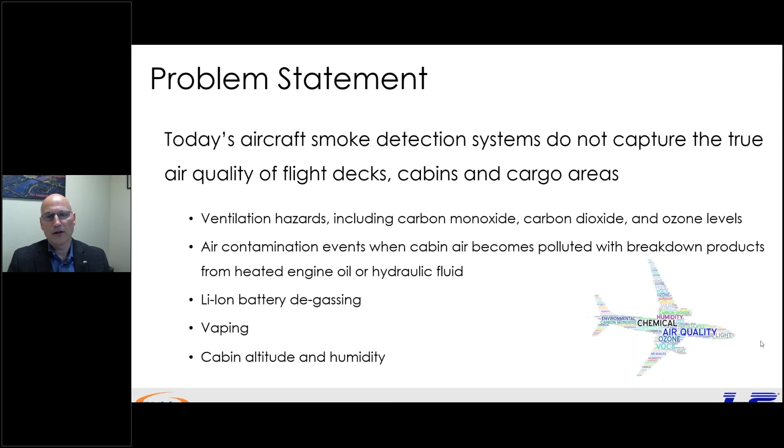And its unique ability to do the detection of vaping, to include THC for those so inclined. Frank and David will explain a little bit more later about the capabilities of the specific system itself.

Next slide please. So here's some quotes, and these were captured directly from a Flight Attendants Union website. A lot of information here, but what you can see is that they really take cabin air seriously, and they work directly with Washington D.C. to solve problems they can't really solve at the carrier level, at least they don't believe they could solve at the carrier level.

And the aircraft manufacturers either don't like or apparently don't agree with a lot of the cabin crew concerns or claims, based on some problem with the bleed air or air cycle design or system. However, it appears it is a real problem. There's a lot of examples when you just Google it on the web.

And there's the health data to back up the flight attendants' claims. Their data seems to be true. We don't have enough information to prove it, but there's enough of it that it makes us think that there is an issue, hence the problem statement.

And we notice their language at the bottom speaks about a lack of training on fume events. They really further the need for some device, an automated system of some sort, of measuring cabin air quality and then alerting the onboard crew appropriately so they can take action as applicable, either in flight or hopefully more proactively on the ground before the issue gets worse.

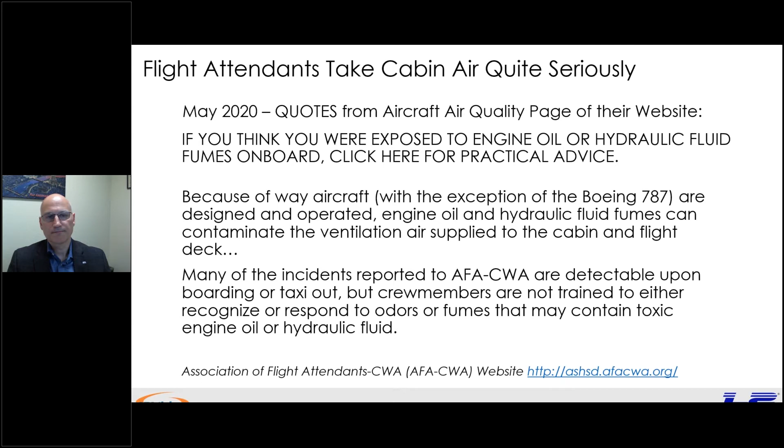Smells in the cabin. Well, we found out these meetings actually do occur, and we learned this when we were originally doing research about options for cabin air. And the original industry conversations meant that they had an issue, and they talk about it a lot. Now, while not naming the carrier, it was quite interesting.

There is enough concern about odor events, so much that the unions have asked for a forum with the airline's environmental systems engineers, and they're using that to investigate the odor, the occurrences, where do they come from, why, what can they do. And just want to add before we move on, I don't think they really call it the smelly committee. It's just something that we just thought it fits. So we have named it the smelly committee internally.

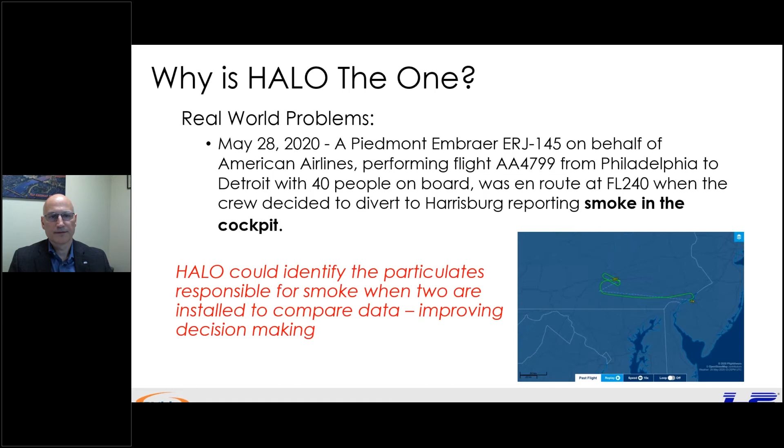We don't know the exact history behind that because it wasn't given to us, but it appears the same issue repeated. Halo is one of those systems that would be able to determine and watch the trends on the aircraft, and again we'll get into that a little bit later.

In this case, the maintenance group did ultimately find oil was getting into the engine, and therefore fumes were able to get into the bleed air system and then the air cycle system, and that drives right into the cabin. Then you smell it, and if it's really nasty stuff, people get sick.

Halo, we believe, could have identified the problem earlier, and maybe that could have helped them find that there was an engine seal that was bad and starting to fail, that maybe you didn't quite smell yet since it wasn't too bad. But these sensors are so accurate, well beyond what a human would smell, that they pick it up. If they could have defined that earlier, they would have repaired it quicker, and then they may not have had the diversion. So all in all, the precise data from Halo of what is exactly in the air can point to a solution, or at a minimum, eliminate a possible problem.

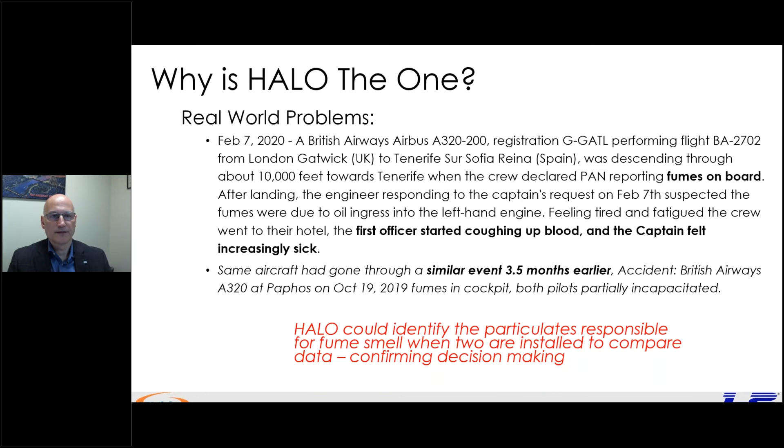So what's Halo? A classic product marketing and phase review process method, which I also love, defines what the product is and what the product is not. Today's Halo is sold in commercial buildings, schools, universities, just tons of places, and we want to move that now to the aircraft.

It can measure multiple chemicals, sounds, atmospheric items, as Dave will go into here in a little bit. The IP video team has a patent pending, and the current product in L2 is exclusively designing, ruggedizing, and integrating Halo for the rigors of aerospace use.

And then, of course, the next step is to get all the regulatory certifications worldwide. So the phase 1 version today is not a smoke detector replacement. We covered that before, but I want to make sure that's clear. We are investigating how to incorporate all of the Halo sensor suites and capabilities with the certified smoke detector at some point, and eventually, because of all the stuff we're reading about now with COVID and so forth, adding a pathogen and contagion detection device.

So we also have a vision for using Halo units and their wireless capabilities to transmit other data streams, more than just air cabin quality. It's the wave of the future, and we're moving that way. All forms of data coming off the aircraft will be more and more important. The data is the power.

So now I'm going to turn it over to David Antar, President of IP Video. Mark, thank you, and what a great job on doing an initial introduction. We're excited to be part of the team and really honored to be involved with L2 in the development of bringing Halo to the aerospace industry.

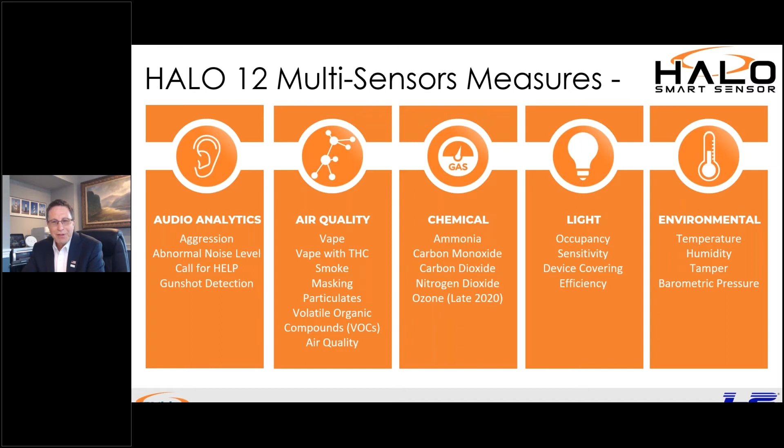And what it's showing is how bleed air comes off the engine into 3 different units before release into the cabin. What Halo's capability would be is that it could do the following things to measure and detect at multiple points in the fuselage, both in the pressure vessel and outside the pressure vessel.

Things like particulate matters in the air. And particulates come in different sizes, and Halo actually can measure 3 different sizes of particulates that might be in the air.

In addition, offenders such as smoke, carbon monoxide, carbon dioxide, ozone, which is coming very shortly to Halo. It was in our roadmap anyway, and we found it's a very important component to have for the airline industry.

Vape or vapor, chemicals, volatile organic compounds, each have unique signatures. And what Halo uniquely does is by identifying a signature of a known chemical that might be in the air, we can then either filter or alert on those.

So as an example, when we use it to detect vape in areas of privacy like bathrooms or locker rooms, we can filter out for hairspray or body spray because we know the signature of what those look like. The more signatures we create for things that might be normal in an airplane, we can start to filter or alarm on those. So that's what makes Halo pretty unique in the things that it does.

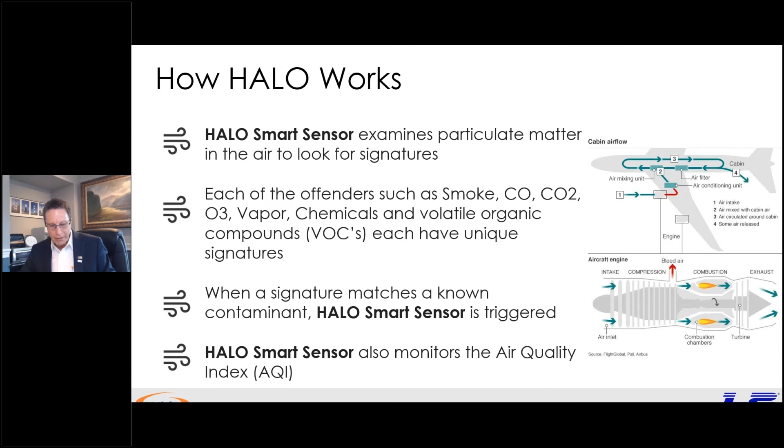So with that, I actually wanted to go to a live demo and be able to show you what Halo looks like. And I think you're going to be impressed with seeing a live shot of Halo.

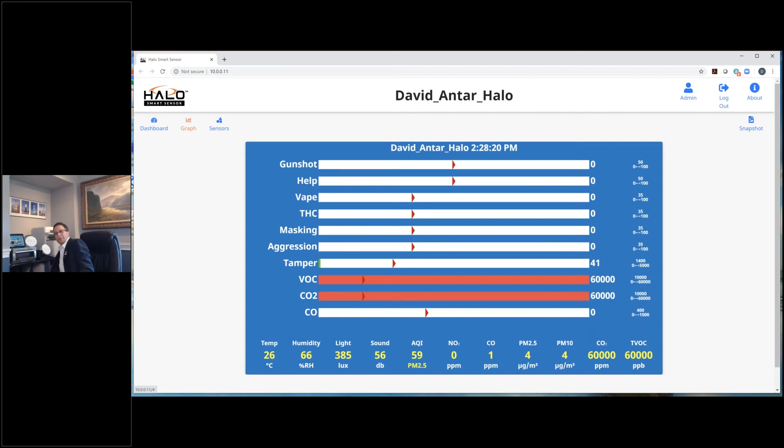So you see the VOC is starting to rise and the carbon dioxide, and it just shot off the scale right now. That was instantaneous from a little bit of acetone being released into the air. So you can imagine how it shows over time those things before an emergency happens. Typically it will show those rising levels and alert at the preset points that we have. You can also see how quickly the numbers are coming back down to normal.

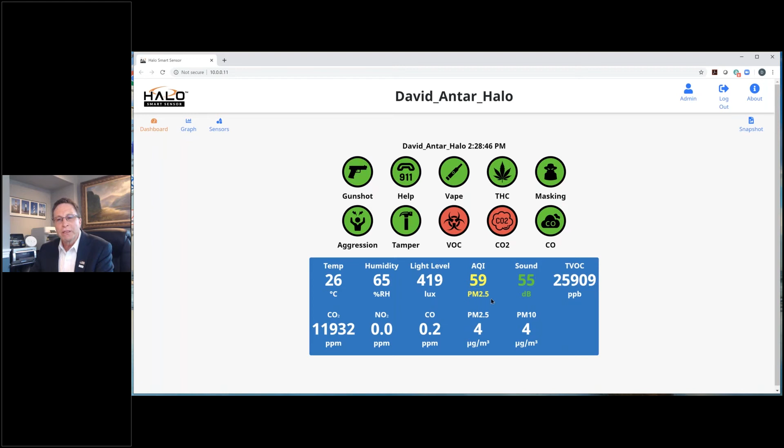I'm going to go back to the dashboard for a second. If you notice the red on the VOCs and the CO2, those are the alarms. Also the AQI went up to 59 right now, which is the air quality index, because that was affected by these. It also shows the sound levels in the background, and shows the VOCs dropping over here all the way to the right. So it's pretty interesting how it's able to bring all these things together and give you instantaneous information.

Halo stores over 1 million data points per day, which is pretty amazing. As that data gets accumulated and we get baselines, we begin to know what's normal versus abnormal, to know what to bring to people's attention and what would require an actual alarm.

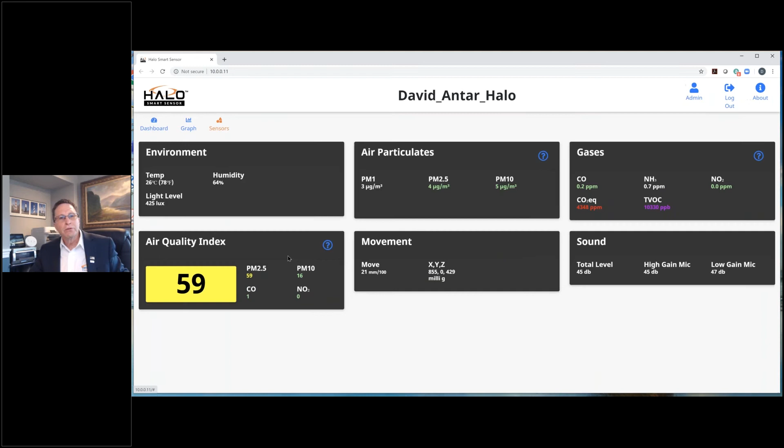So with that, I'm going to bring us to the sensors themselves. I'm going to ask Frank to join us for a few moments. Frank, why don't you talk a little bit about the sensors, and then we're going to turn the PowerPoint back over to you. Thanks a lot, David.

As David pointed out, we have several available dashboards. The one we're currently looking at is the raw data coming out of each one of the 12 sensors that we have in Halo. We have environmental sensors like temperature, humidity, and light level.

We measure particulates in the air from 10 microns in size, 2.5 microns, and 1 micron. These are important measurements, especially the smaller ones. You can imagine breathing in these particles and them causing respiratory problems, especially for people with asthma who would have problems with these.

We measure gases in the air from carbon monoxide, carbon dioxide, ammonia, nitrogen dioxide, and volatile organic compounds. We also measure sound and movement of the device. And finally, we measure air quality index.

So when you look at this, it's clear that Halo has the ability to measure the cabin air quality, which should really make the FAA happy, because that should allow them to identify these fume events with what's actually going on in the cabin during the flight.

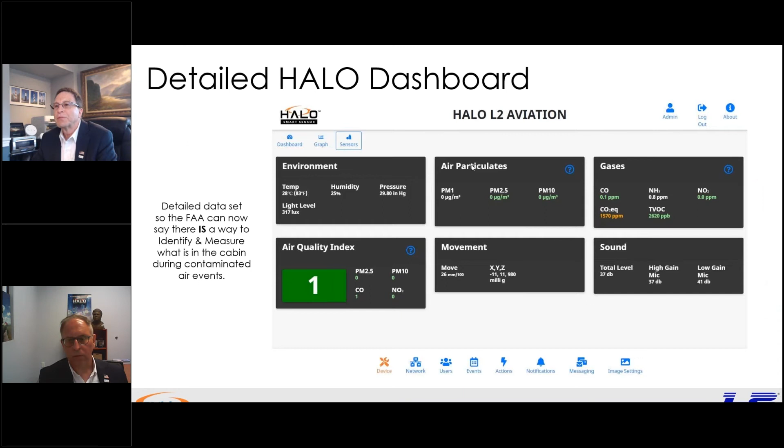Okay, one more slide please. Okay, so air quality index.

Think of air quality as a yardstick that measures values from 0 to 500. The higher the AQI value, the greater the level of air pollution and the greater the health concern. For example, an AQI value of 50 or below represents good air quality. You want to see that level, you want to see green for all the air quality measurements we make.

But if you're in an AQI of over 300, now you're in a region where it's going to be hazardous to your health. So as you get into that red and purple areas, you really need to be concerned.

The air quality is measured into 6 categories, and as you go through the colors, as you get below green, each category represents the danger to your health. So green, you're good. If you're yellow, it's only if you are sensitive to certain things, like if you had asthma, it starts affecting you. Until such point, even healthy people start getting affected.

So it's something that we need to monitor very, very carefully, whether it be in our cities or in our cabin airs. Next slide, please.

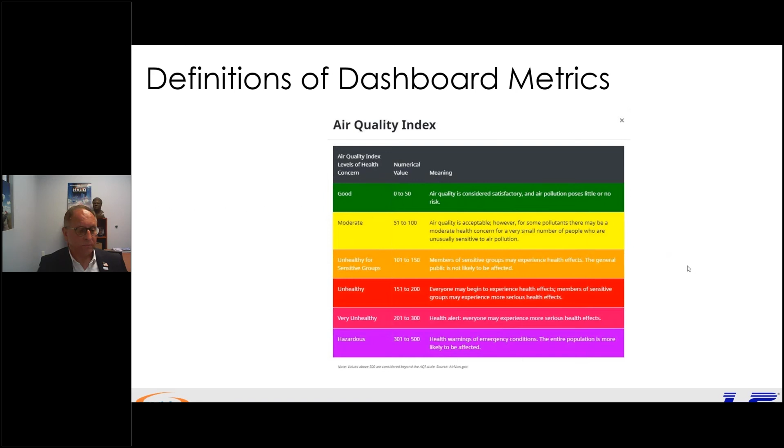And with that information we can start combining maintenance information, fume events, and we can start using artificial intelligence and deep learning techniques to see where the correlations are. So if you think about the power of deep learning and artificial intelligence, we combine all these millions of data points over, say, 5 Halos that are located throughout an airplane.

And we know when the plane took off. We know when there's a fume event. We know when maintenance has been done. And we apply intelligence to this. Now we can start identifying the causes of these events and actually start to come up with ways of preventing them.

So if we know that we see a certain signature starting to rise, and we know that's caused, say, by a faulty gasket, what we can then do is schedule preventative maintenance on that plane before that actually becomes an event when the airline is in flight.

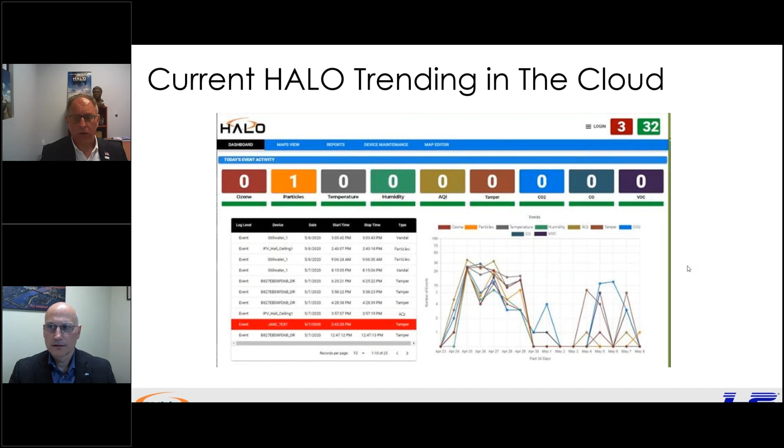So we can save time, either from flight delays caused by these fume events, or from diversions to other airports, the cost of diversions. We can start preventing these by analyzing this data and doing such preventative maintenance. So this is just one of the powers you have from using Halo and combining all this information. And with that, I'll turn it over to Mark.

Well, thanks Frank. So the next couple slides get into a little bit more detail about a typical cabin air system, whether it be bleed air and air cycle systems, that type of thing. But really what we're looking at here is when we're doing the Halo development and optimizing the placement of these LRUs, we've been looking at a variety of different configurations.

It's what we do, we're integrators, and we've started to interface into the aircraft systems in a way that provides feedback to both flight crew and the cabin crew. We'll get into a little bit later about some of the alert modes and things. But here, the real focus is that we've researched and validated a variety of airflow options in typical aircraft.

Like for instance the 737, and we looked at some that are about 15 years old, at least delivered about 15 years ago, looked at some NGs, and now we're starting to look at the MAX, which of course we all wish they were flying.

But as some of you may know, about half of the airflow is often recirculated in a lot of this generation of aircraft. Now the 787 has a dedicated system, it's all fresh air, it's not part of the bleed air system, and you get high powered fans basically blowing all that air in to pressurize the aircraft.

But for the 737, a lot of the aircraft of the pre-787 era, we are recirculating the air, and the typical passenger doesn't know that. They just sit there in the seat and they've got a gasper over their head, and if they smell something, they don't know where it's coming from.

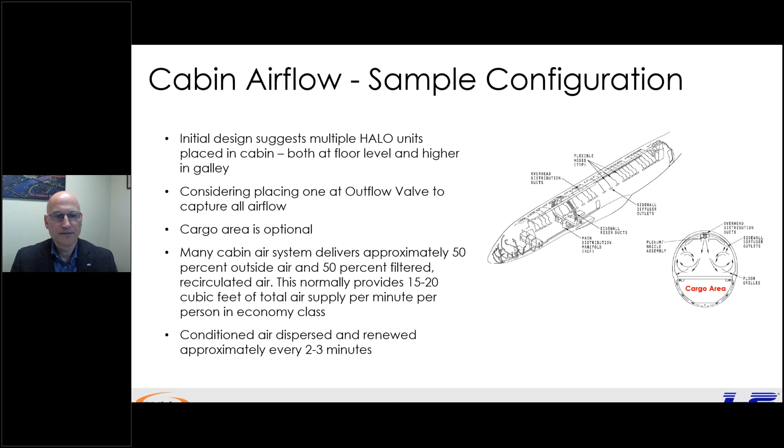Now of course those areas already have smoke detectors, and we're looking at ways of either supplementing those or eventually replacing them. Next slide, please.

Sample configuration - we've been looking at different places we could put the units for both detection and measurement, and we want to optimize those. One thing we're focusing on is that there's a mixed manifold and air gets dispersed, so we're looking at putting Halo units on each one of the inlets.

Now, it's not on this particular diagram, but something you may be wondering about is that on the actual lavs or galleys, where there's air that potentially smells, you could outflow that. There's usually some sort of port near those areas that can just flow it right out overboard. However, what happens if there's a leak in that system, or something's wrong, or it's not working right? Then all that smelly air is getting into the cabin.

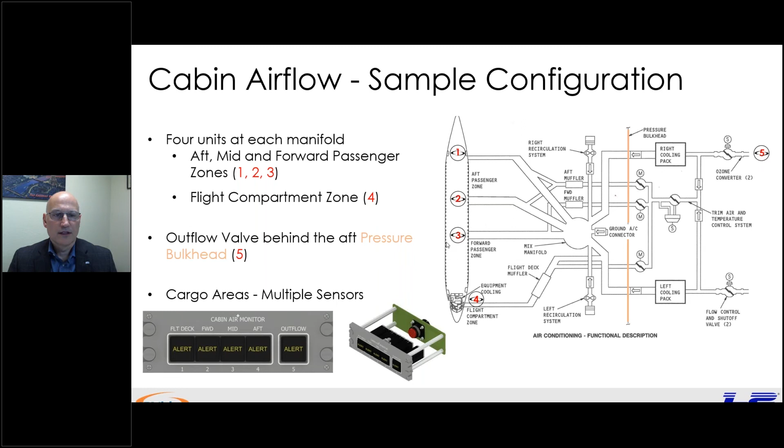The question is, what is and what isn't in the cabin air today? So we'll use these units to support a variety of testing, and we'll measure the baseline of cabin air data. I think that's really what we all want - to baseline it across different configurations and different situations.

We have a couple candidates actually looking at putting this on board the aircraft so they can just measure away. But if anybody on the webinar, or if you know anybody interested in using some of these units, we will make more.

Now, the obvious thing as well is if you were to put this into an area like a galley, or hide it behind a door, you're not going to get the same amount of airflow. So we really do need this to be where the majority of the cabin air is going. Next slide, please.

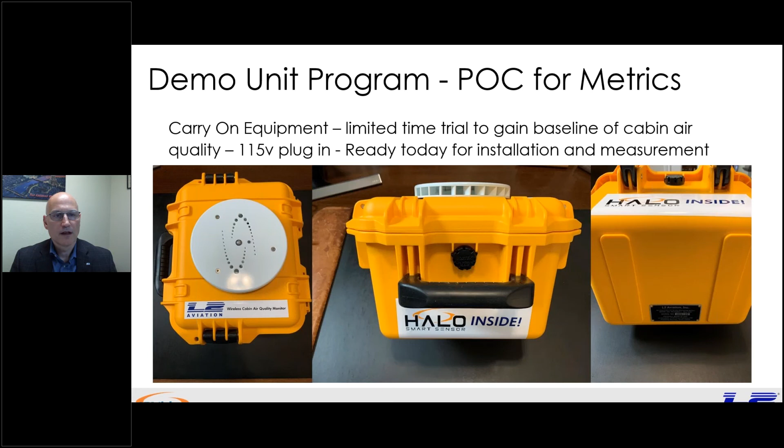There are unknown smells, passenger and crew complaints, and a lot of anecdotal evidence of poor air quality. Everybody's asked over the years: is the HEPA filter bad? Did the airline take it out to save fuel costs? It does take energy to have a HEPA filter in there. Is it just way too old? Is there a failure in the bleed air system? What is the guy a couple rows up eating, and is it something he should be eating? Is there a cleaning chemical spill? And in general, is the smell you have natural or unnatural?

This system allows you to do the analysis, gather the data, and do all the trending over time. You'll be able to know in real time the severity, and more importantly, trend the air quality data and perform predictive maintenance before it's an issue. So now Halo gives you the ability to do just that.